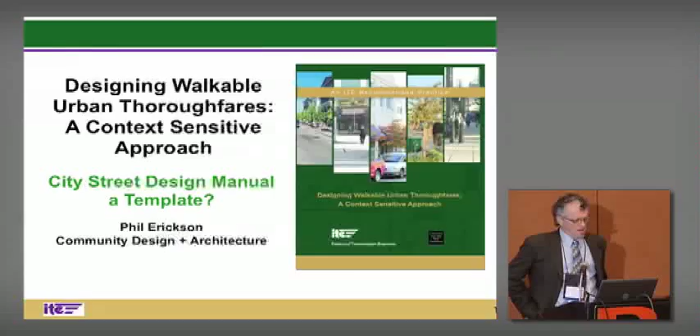So that's what this document does. It's called a context-sensitive approach. It really is context-based. It's called context-sensitive because that's what the Federal Highway Administration calls it, and they're a funder, so heck, we're gonna call it that.

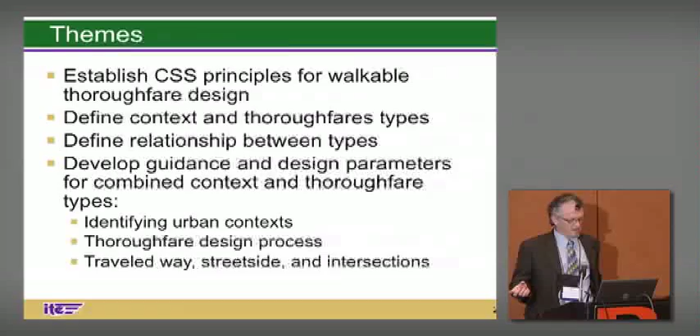It really does get into defining context, a way to think about context. It defines thoroughfare types and the relationships between these, and then it provides guidance and design parameters that look at different elements of the street and relates it back to the context and the thoroughfare type.

As I mentioned, Federal Highway Administration was one of the funders. The EPA Smart Growth Office also funded it. The project was a joint effort of ITE and CNU, Congress for the New Urbanism. There were a number of us over years and years through CNU talking about streets, street network, and street design issues, and really felt the need for a new national level guidance document.

I think there were some people that felt we needed to do a national standard and really just nail down some rules. But CNU found a partner in ITE—kind of surprised to find them as a willing partner—and entered into an agreement with the funding agencies to prepare this document, which focuses on... and this was a confusing issue throughout the whole preparation of the document.

It focuses on urban places, which in that definition of urban does get into things that are suburban, but places that either are or have the intent to become walkable.

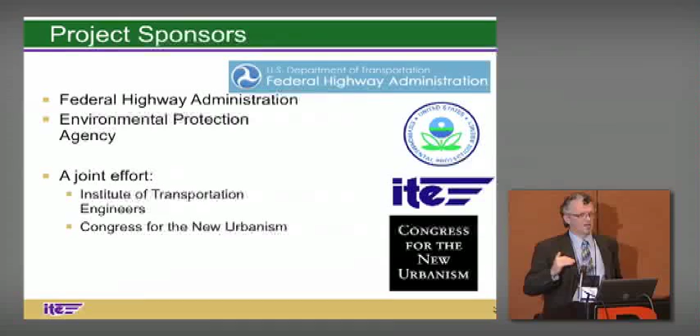And that was often forgotten, particularly by our Federal Highway Administration member of the committee, who was always asking, well, how does this apply to that big suburban street in a big box context and all of these things? And we had to keep saying, if the community wants it to be walkable, then it applies. If they don't want it to be walkable, then it doesn't necessarily apply.

A broad variety of people were involved. There was a technical committee and more of a policy steering committee. Then all of these types of people were there: traffic and design engineers, transportation planners, land use planners, architects, urban designers, landscape architects, transit planners, representatives from AASHTO, which was really important as we moved forward.

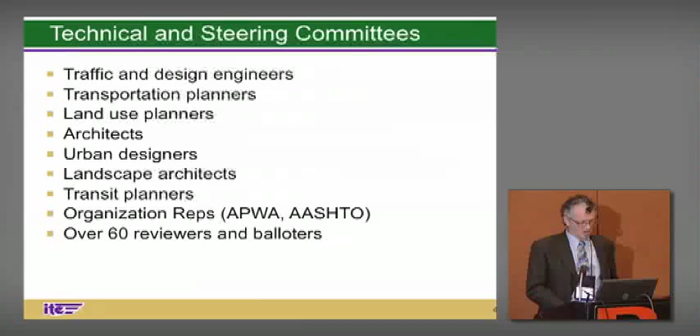And then it went out for review and balloting, both by ITE members and by CNU members.

Again, this is what I was talking about. It's walkable, urban, and that means suburban towns, city centers, neighborhoods, typically with a mix of activities, looking to support transportation choice, and then what we called thoroughfares, going to the functional classification system—and this was a tension as well throughout the whole preparation of the document.

It's about what are typically arterial and collector streets. Local streets, neighborhood streets are not what we were primarily looking at.

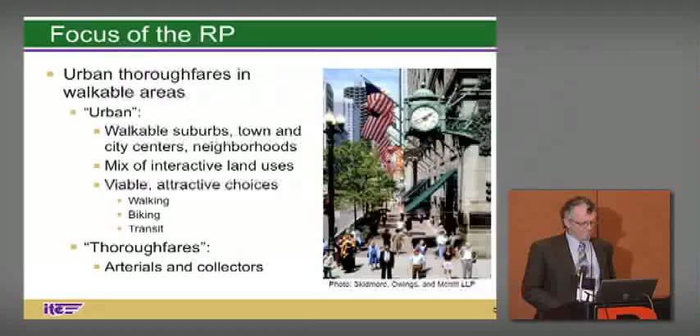Tenets of context-sensitive solutions really are a lot of, when you look at the federal policy, a lot of it is really process-oriented, about community objectives, balancing mobility and the environment. It really came out of more of the NEPA process, so it's originally focused much more on environmental issues and historical preservation issues, but has come to get into multimodal approaches—again, being interdisciplinary in how you go about planning improvements to a roadway, and being flexible in the design.

So looking at both, looking primarily to the Green Book, but also I think intending to get particularly state DOTs to look at more flexibility.

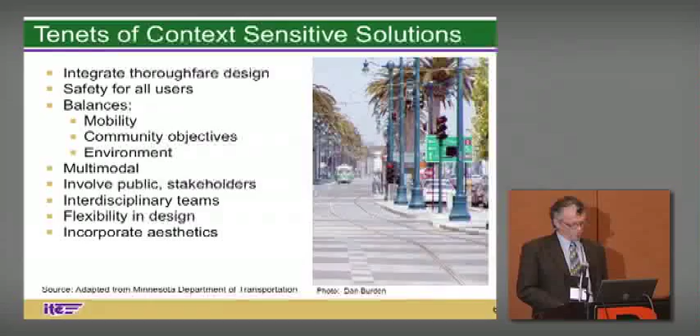In terms of this question about public input, not exactly. The professional and planning public, certainly—again, a really broad net of people who were involved in preparing and reviewing this document, but not a real public process because, again, it's really more looking at national level guidance and not really trying to apply it to specific locations.

It went through a process where Kimley Horn was the lead consultant. We were the urban design pedestrian consultants.

ITERIS was involved in some of the work. Ellen Greenberg, who's now at Arup, was involved with it. The project manager at Kimley Horn, Jim Daisa, is also now at Arup. A variety of different consultants, all these volunteers involved, worked at getting a proposed recommended practice.

ITE has this process that their recommended practices go through. First was a proposed recommended practice, the blue cover version of this document, if you ever see it. That went out and started to be used by people in designing projects and looking at policy.

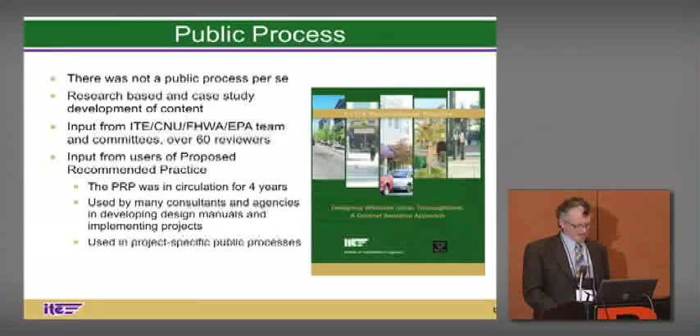So very focused on a product, get this manual out so people can use it, but a lot of process in getting there. I spoke a little bit about the federal highway issues. There were, again, a lot of tensions that I'll highlight as I move through this, where there were decision points that had to be made.

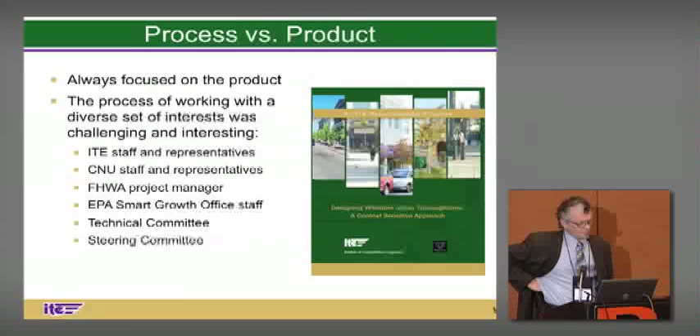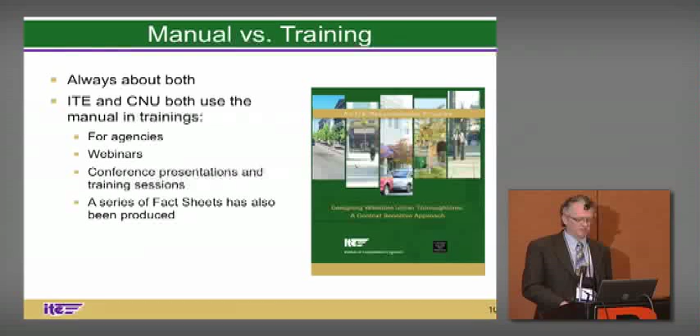Manual versus training. It's always been both. The intent of both ITE and CNU was to get this manual out there, but then use it as a training tool. So both ITE and CNU do go out and do training. ITE has done a number of webinars and intends to continue doing that. Probably at this point, hundreds of conference presentations by different people involved in the project. And there's also a series of fact sheets that ITE has put together.

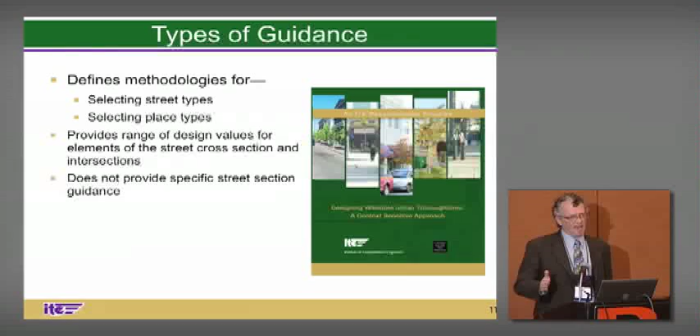The types of guidance that are here get into defining these different ways of thinking about place and street, and then talk to the methodology. How do you go about looking at what you have and deciding what street type and place type it is? And then again, it gives you the guidance specific to those.

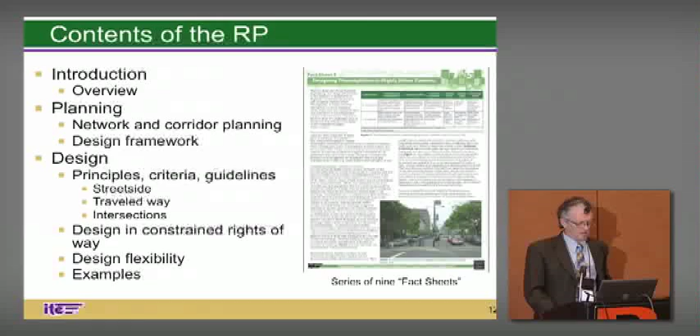The outline of the recommended practice—I'm not really going to speak to the network and corridor planning pieces of it, and try to get more into the place and street types and some of the design guidance. Broad breadth of intended users, of course engineers and planners, but there was an interest in the document being written in a way that elected officials, agency managers, developers, and citizens could look at this document and use it as a tool as well to influence policy and design.

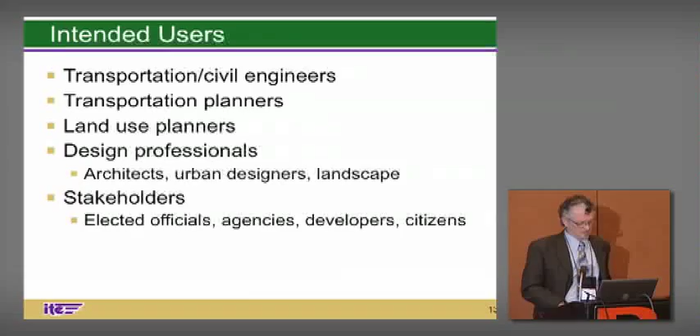You get out and look at the different kinds of places that we're talking about as urban, from suburban to a city center, and there's a great difference in terms of not just the urban fabric, what development looks like, but if you look at the streets that are there, there tends to be different emphasis in those streets.

Then we also looked at the design criteria, and the big debate was functional class. There are a number of people out there that think that this way of thinking about streets—arterial, collector, local—we just need to get rid of it. It was decided that we needed to come up with a way that we could overlay this system of this manual into the arterial, collector, local system, so that people who have only learned arterial, collector, local would understand it, and so that it would help in implementation.

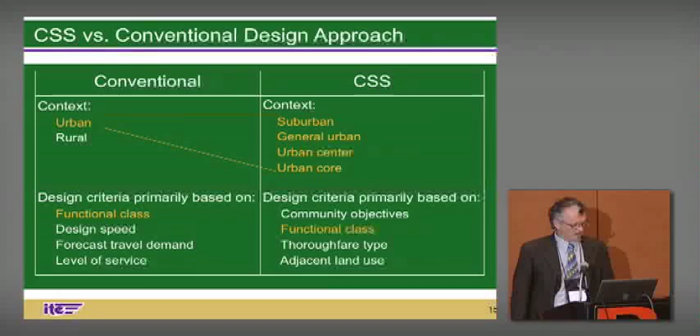Defining the context zones—this is based on the transect zone system that Andres Duany and a lot of people in CNU use, and to tie it back into CSS, we call it context zones. It looks at type and mix of land use, densities, the general character, how buildings are placed, how buildings front the street, how open space fronts the street, building height, and types of public space.

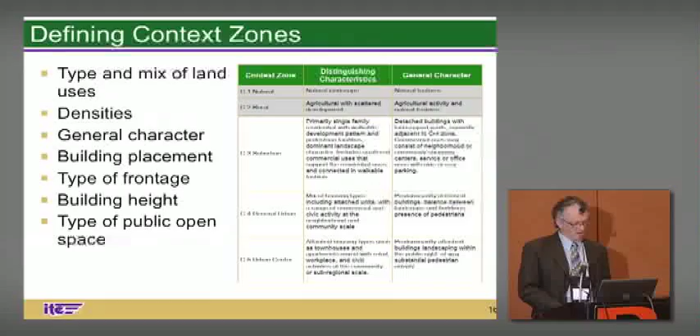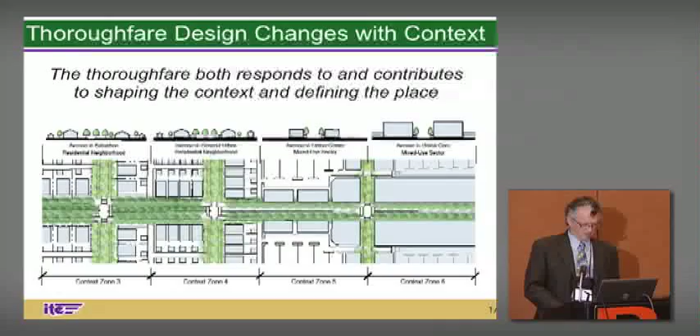There's this idea that the design of a street, as it moves through the context, should adapt to the context that's along the street. Even the right-of-way width might vary. So here's a visual example, a suburban street today. This is in Charlottesville, Virginia.

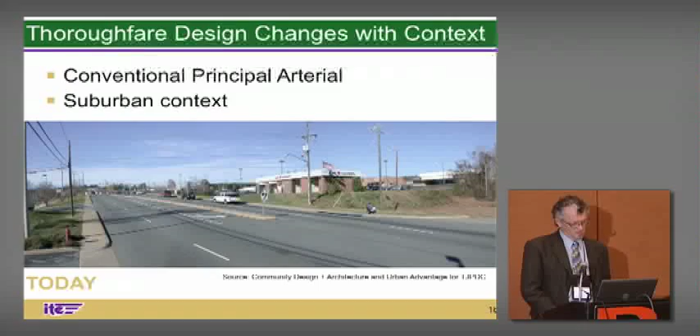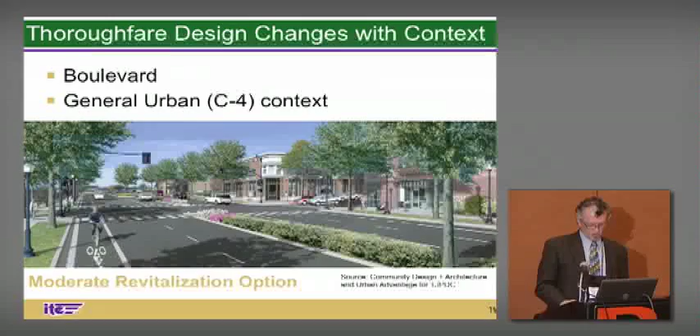If a more urbanization of the area moved forward, but it's not particularly intense, you might get this kind of street that would come out of that. And then if it were a more intense area, with much more focus on walkability, shared parking, and those kinds of things, then you would get a street design that might be like this.

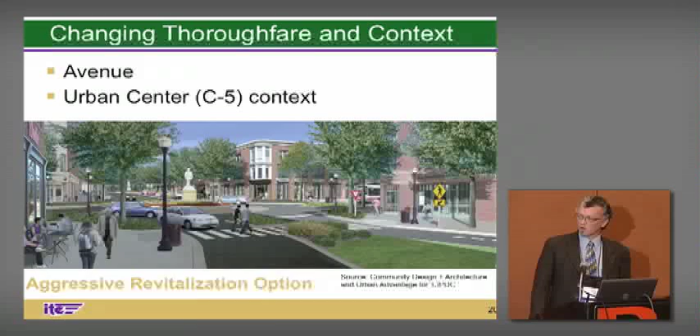So the idea was, how could we establish guidance that could lead somebody through the decision-making process to design the street that would work with context? Here's a diagram that is a matrix in the manual that gets at this relationship between functional class and thoroughfare type. The thoroughfare types looked at are Boulevard, Avenue, and Street, and how those relate to the different functional classifications.

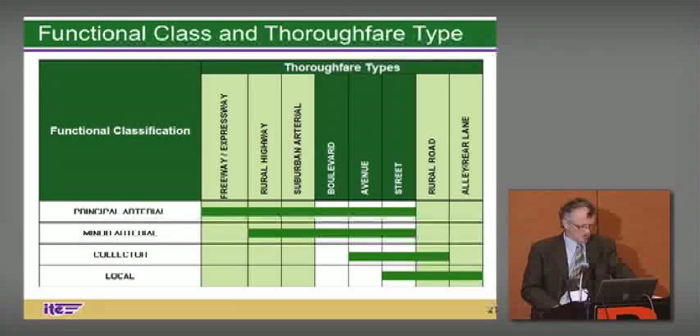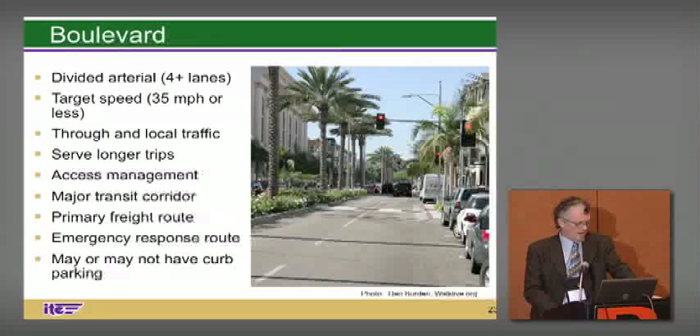The Boulevard, the larger of the streets, typically has 4+ lanes, a target speed of about 35 miles per hour as a maximum or less, more of a focus on through traffic but also local traffic, and tends to serve longer trips. It might also be a transit priority corridor, have more of a focus on freight or larger vehicles, often serve as an emergency response route, and may or may not have parking at the curb - another debate point. Here are some examples of those kinds of streets.

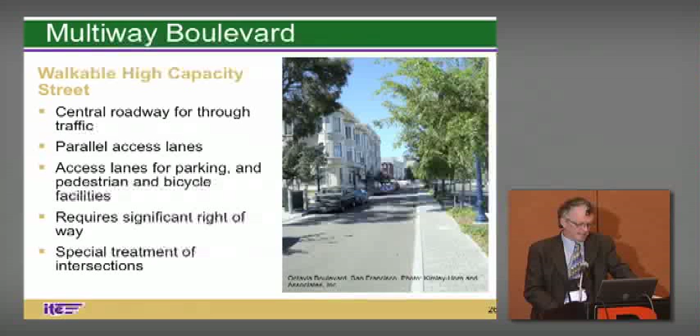Multi-way boulevards are now talked about in the manual. That was something that was in flux as the manual was put together - this idea of through lanes in the middle of the street and then more of a local lane separated by a median along the context. This is that Octavia Boulevard example in San Francisco again, and there are historic examples of these streets all around the country.

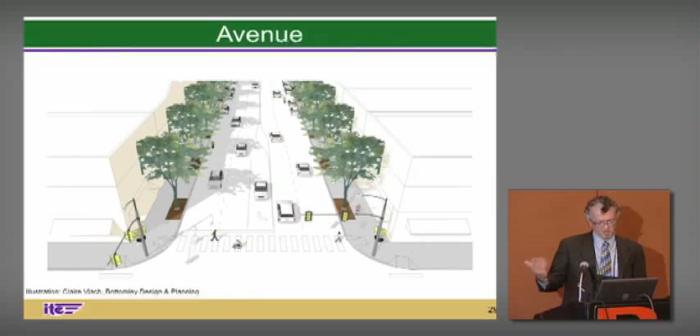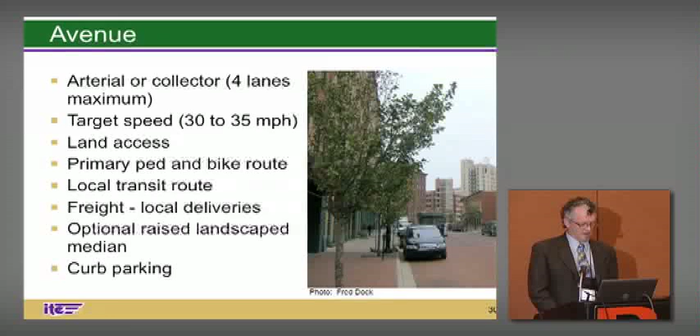The avenue is probably the broadest of the street types in terms of its applicability - there are many more of these than other street types in major areas. Up to 4 lanes, again a subject of debate, with a target speed of 30 to 35. They tend to have access to uses right there, serving as primary pedestrian and bike routes, probably more of a local function for transit and deliveries. Here are some examples of what avenues look like.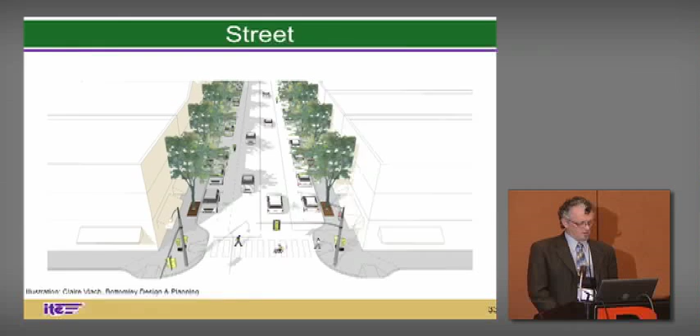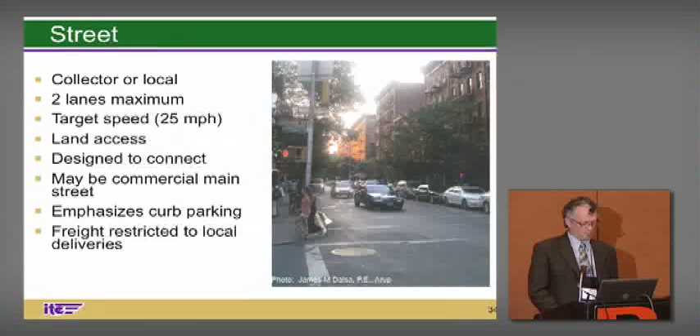Streets, 2 lanes maximum, target speed 25 miles per hour. These tend to fall more in the collector-local range. Main streets - most of what you think about as commercial main streets, two-lane main streets at least - fall into this category, with emphasis on curb parking and not truck routes, though you do have to accommodate local delivery. So these are more of the local types of streets, and some of them may be primarily residential.

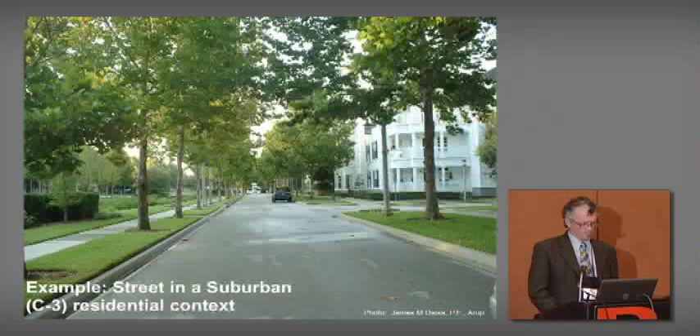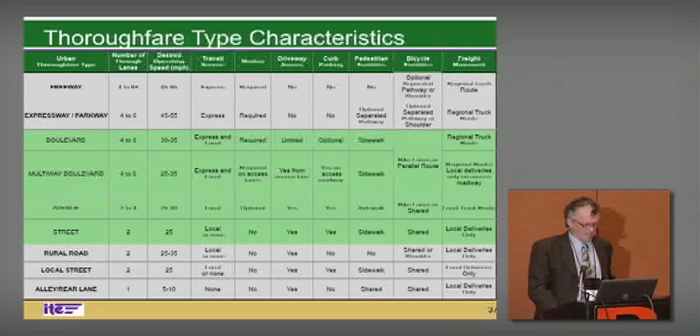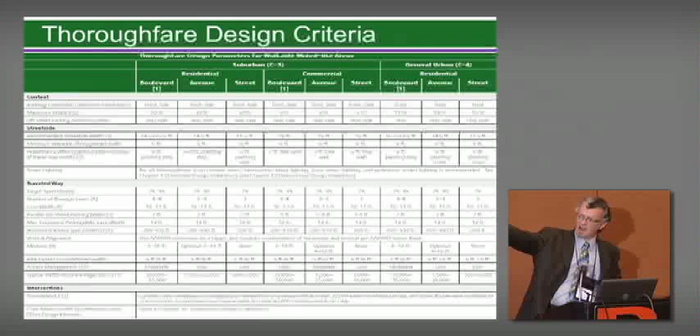And then there are these kinds of very dense tables that get at the relationship of the context type, the primary ground floor land use - is it residential or commercial - the different street types, and then guidance related to setbacks, so context guidance, sidewalk guidance, travel way guidance, and then discussion of intersections. So a lot of detail in these tables.

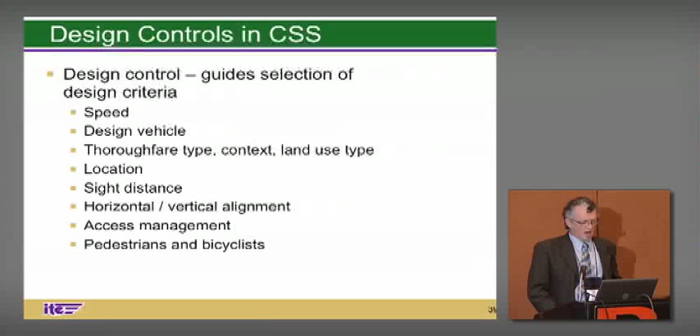Well, there's this idea that as this document was being prepared, we all of a sudden found people from AASHTO and others saying, yeah, this target speed thing, that's what we need to be doing, because this old method really isn't safe.

If we want people to travel at 25 miles per hour, we need to design the street for 25 miles per hour. We've been able to use that on a number of street projects to make a difference in all of those detailed geometries of the street design, so that the street isn't being designed to allow people to drive 10 miles per hour faster.

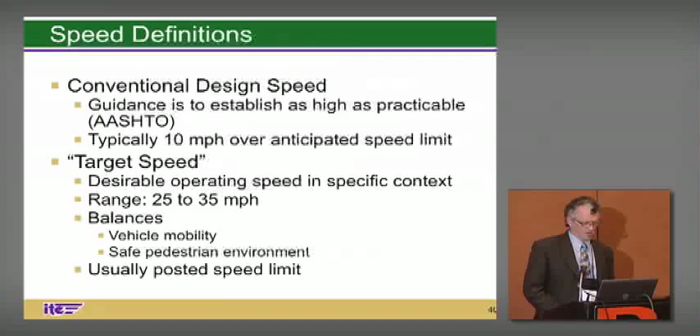I mean, you still can—there's so much leeway in this guidance that you could still safely travel at probably 10 miles per hour faster, but you won't hopefully see people driving at 25-plus over the intended speed limit. Because speed affects all of these elements—lane width, shy distance, the offset from a median, super elevation of the roads, the way that they slope, shoulders, whether you can have on-street parking or not, curb radii, the design of right turn lanes, traffic signal spacing—all sorts of things factor into speed. So a really important breakthrough, I think, in this document.

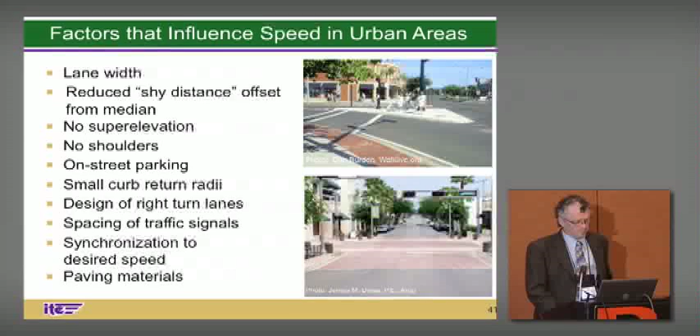Again, the manual looks at breaking down these different elements, components of the cross section, gets into some of the things that you saw in Ryan's presentation about breaking down the sidewalk. I'll move through these quickly.

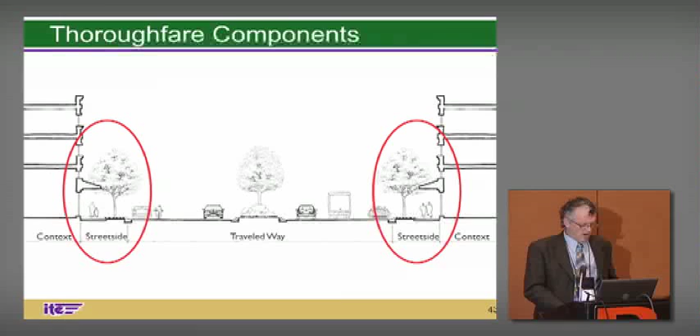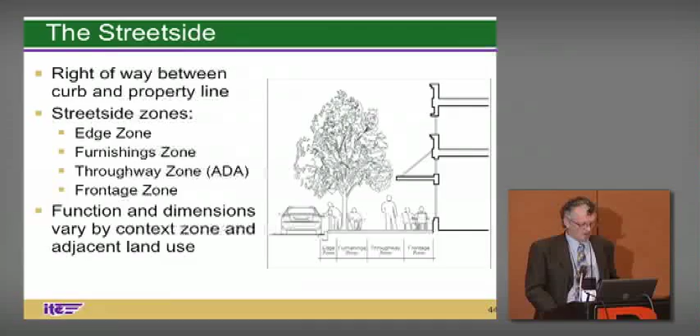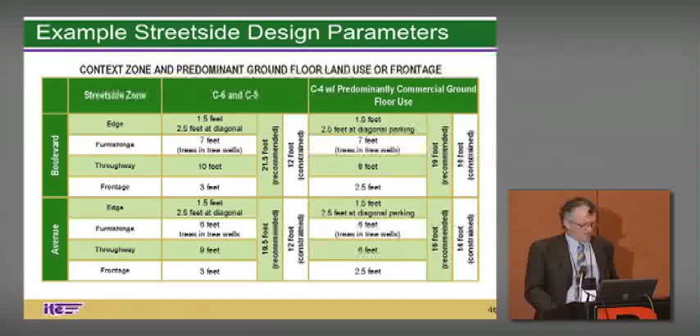It gets into at least mentioning all of these different areas, making reference again to other documents that are out there, pointing out some of the potential conflicting issues. It does provide guidance getting down to the details of sidewalk width and the width of the different areas of the sidewalk.

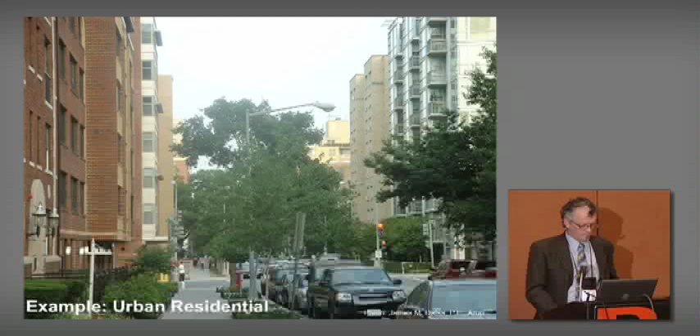Examples of the kinds of streets that we were thinking about. Then it also looks at the traveled way and gets into all of these and other issues—bike lanes, lane width, snow removal, stormwater management is mentioned as well.

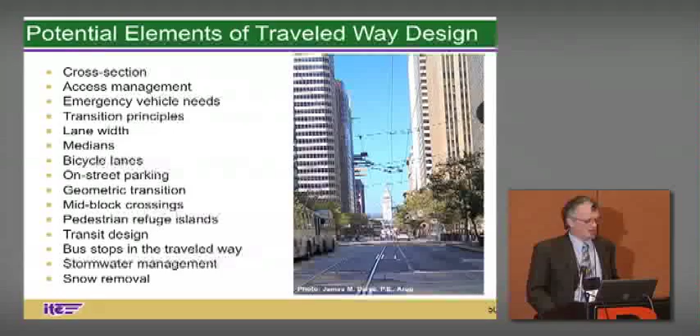Lane width, again, was a big discussion. One of the things that was a constraint on this document is that all of the design recommendations, the dimensional recommendations and others, had to fit within what's allowed by the guidance in the AASHTO Green Book. So there were people that felt that when we were getting down to the slower, smaller streets, that we should allow narrower than 10-foot lanes, but given that AASHTO Green Book kind of guidance, it was decided that we shouldn't go narrower than that.

Speed was another discussion area, in terms of how low we can take the speed on these streets, and we ended up with 25 being the lowest. That was generally done because a number of states don't allow you to have a posted speed lower than 25 miles per hour. Again, this is based on target speed, the design vehicle, and these other elements.

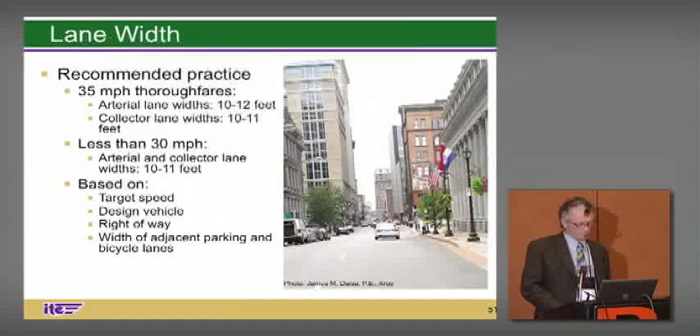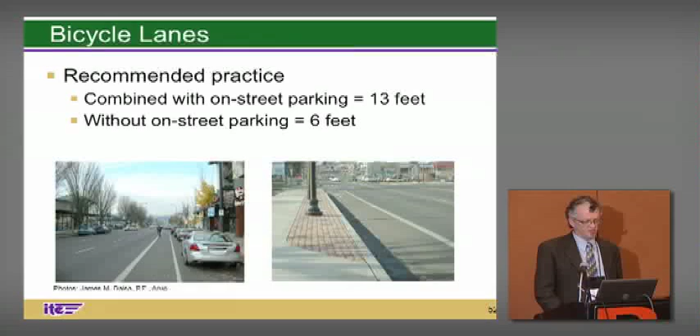Bike lanes, again, sort of as Ryan was saying, not a lot of detail here, in reference to other documents, but it's important to talk about because of the trade-offs amongst the different elements.

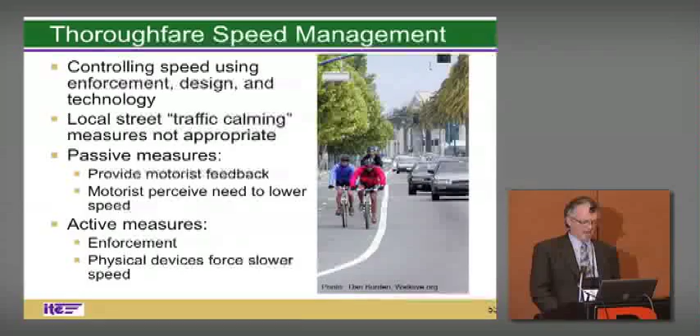A lot of discussion about what is termed in the manual as speed management, because there is this concern amongst a lot of particularly traffic engineers—we're talking about big urban streets here. Are we really doing traffic calming? Isn't that the thing we do in residential neighborhoods? So the language here is speed management on the larger streets, talking about both the context design, the designs within the right-of-way, and then active measures that can happen to manage speed on these large streets.

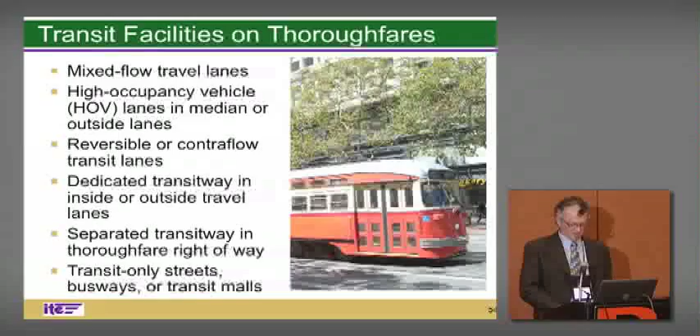Transit facilities are talked about. In the earlier recommended practice there wasn't that much detail, but a lot more detail has been added in the final document.

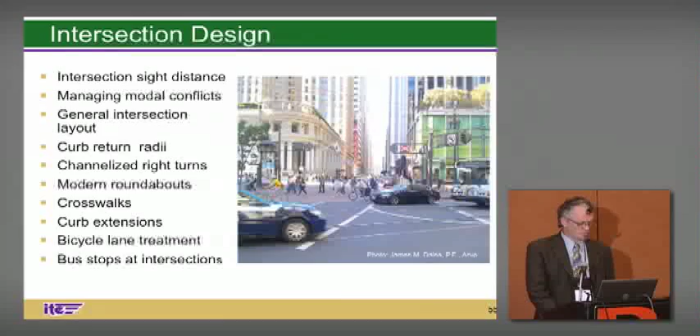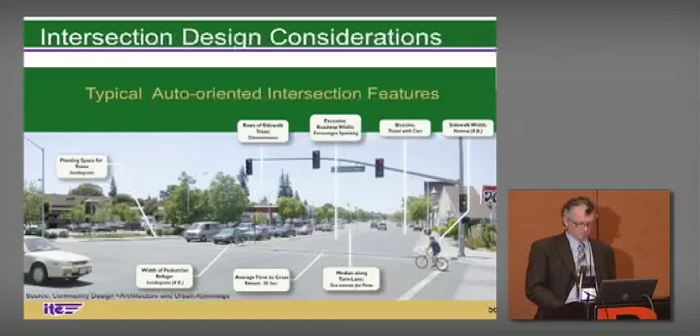Intersection design is another big element of this manual, getting into these things about the interrelationships, again, of modes and the standards that we have at the design of an intersection. So if you're able to take what's more of an auto-oriented street and make it more context sensitive, you can shorten the amount of time it takes a pedestrian to cross the street, which actually ends up benefiting the throughput for traffic on the main road. Those kinds of things are spoken to in the manual.

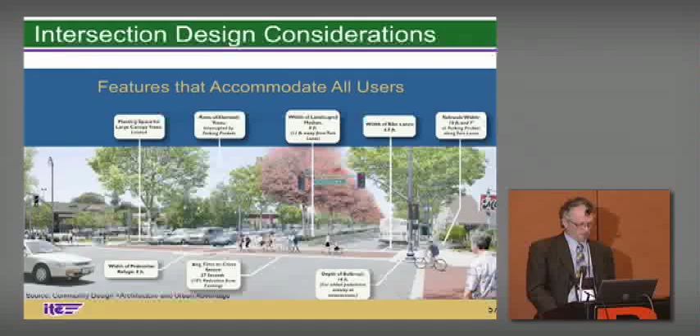So implementation—as I mentioned, both ITE and CNU are doing training efforts. CNU has also been using the manual to reach out to communities to offer design assistance. The Texas Department of Transportation has adopted the manual for guidance on state urban streets and state highways in urban areas, and the city of El Paso recently adopted the document at a city level.

It has been referenced in the Washington State Complete Streets Program legislation, and I think has influenced other legislation around the country.

So far, somehow this number seems low to me, but over 1,500 downloads from the ITE site. You can download it for free from ITE. And it's been utilized to provide design guidance by hundreds of practitioners. As I said, we've used it on a number of projects and will be continuing to.

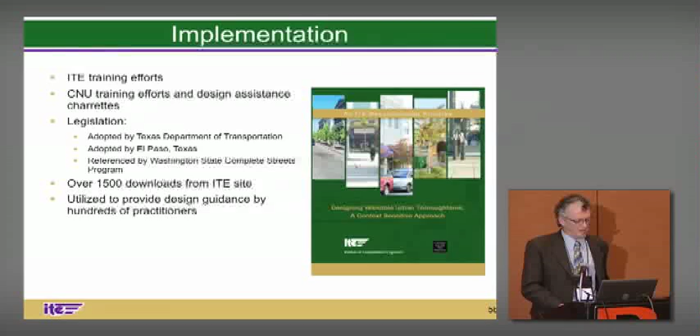So the two web pages here, ite.org/CSS has—I can't remember if the download of the manual is directly from there or not, but it will get you there. There are also PowerPoint shows that are there. This is based on a PowerPoint show that you can download from that website.

The CNU webpage is cnu.org/streets. And that has information on what CNU has been doing, and they've been also trying to keep up on sort of the news of what's happening with the implementation and use of the document.

I think ITE and Brian Bochner and others are continuing to work to try and get the state DOTs and also MPOs to recognize that this document exists and bring it into their policies to get at some of these issues that we've been talking about, what can you do with the state DOT departments.

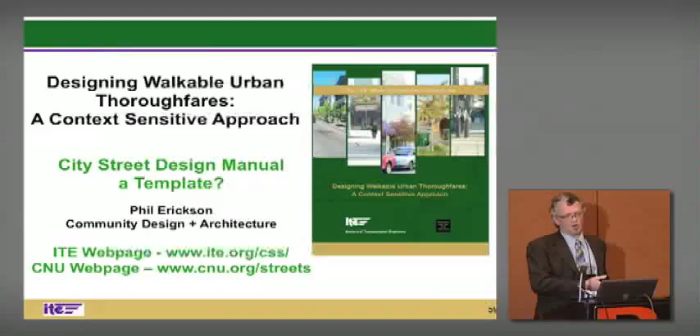A lot of DOTs now have some sort of CSS policy or maybe a complete streets policy, but it's a policy. And what happens when you talk to their engineers who are designing roadways or reviewing roadways, they go, yeah, I know there's this policy we're supposed to be implementing, but I go to our state highway design manual and I don't see the flexibility. So we still have to go through the exceptions process. So there's a lot of work, I think, left to be done at that level.

Let's see, what other things? I think this manual has inspired a number of cities to look at making changes. I think the combination of this giving you that engineering avenue into—oh, we can really interpret AASHTO this way—and something like Ryan's manual that he worked on for LA County, which is much more comprehensive and broad, and I think really does a great job of touching on a lot of these issues, but doesn't necessarily drill down to some of the technical stuff that this manual does. It's really the combination of these kinds of things that can help you figure out how to implement these ideas in your community. So I think that's it on the ITE manual.